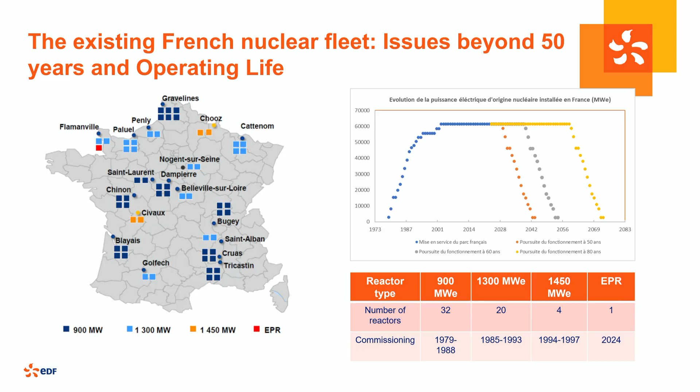So we will have to think to what will be the future and also to plan when we will shut down definitively the reactors and when there will be the opportunity for the EPR2 to take the lead.

Oh, sorry. Yes. What about what is happening all around us? Why continuing after 60 years of operation? Our fleet is quite young because it's 37 years old in average. And as you can see, in Switzerland, in the US, in Belgium, there are many reactors older than the French fleet. And some of them are more than 50 and close to 60 years.

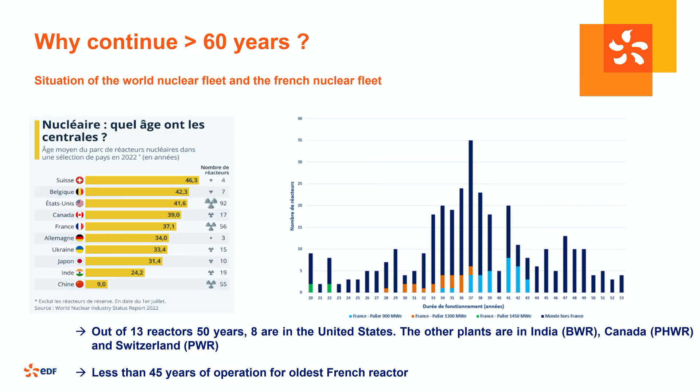So this is very powerful in terms of return on experience. Most of them are PWR, so pressurized water reactors, so same technology. It's quite easy to have benchmark and to share experience with them.

What are the key milestones in France for the French nuclear fleet? In 2021, our Nuclear Safety Authority decided the pursuit of the 900 megawatt fleet. So we have 32 reactors of this type. And this is the visit, so the periodic safety review at the age of 40 years, to go from 40 to 50 years, because in France, it is by 10 years that we have the authorization from the Nuclear Safety Authority.

So in 22, we decided to launch this fourth periodic safety program, with different discussions with the Nuclear Safety Authority. And by the end of 2026, because we send them a lot of data considering going beyond 60 years, the Nuclear Safety Authority will send to the French government the position of the authority regarding operating beyond 60 years. We say beyond 60 years because we don't know if it will be 70, 80.

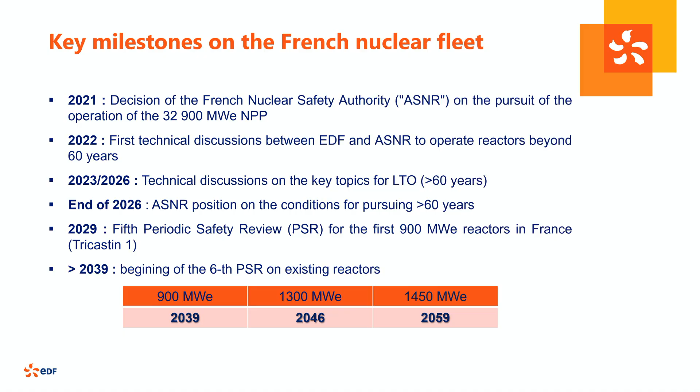So beyond 60 means that there will be a sixth periodic safety review, meaning that we will go from 60 to 70 years. But for some technical side, we are also putting the data and also calculating what it's going to mean for 80 years. So this is data that we are providing, and we'll see what will be the opportunity. But for sure, in France, and I think it will remain like this, it's each 10 years that we obtain the authorization for 10 years more.

When you look at the calendar regarding the different fleets, for the 900 megawatt fleet, it means that this 6th periodic review will start in 2039. And if you look at the N4, so the 1450 megawatts, it will start in 2059. So quite long from here. But it's really the opportunity to speak about that and to prepare also the industrial partners.

How do we proceed for this periodic review? Because as you can see, it's 2060. In 2060, there will be a lot of things changing, and for sure, the climate change. So it's also one specific part that we are working on. So anticipate the expected first. How do we anticipate that? Each 10 years, we have a safety reassessment. So it means that we take the standards, so the safety standards of the moment.

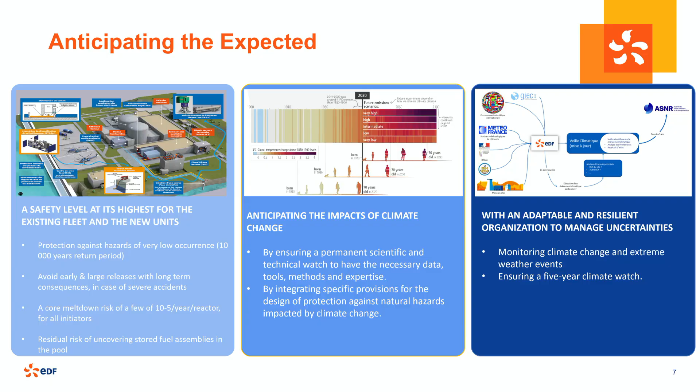And so we are working with Météo France and all different organisms, the data from the GIEC, and by 2060, to take an example, because this is the age of the 6th periodic safety review for the N4, so the 1450 megawatts. So in 2060, what will be the climate for Chooz? It is in the Ardennes, and Civaux. So these are the two plants where we have to think about what will be the 6th periodic review in 2060 or 59 for these plants.

So we are really working on that, doing some projection, and also finding ways to reduce consumption of water and electricity, and to work on resilience.

So safety level, as I told you, each 10 years we have design modification, design improvements. For example, for the 4th periodic safety review that is proceeding right now for the 900 megawatt fleet, we have already completed almost 25 PSRs, so the 4th PSR. There will be the complement to 32, because we have 32 reactors.

And for the 1300 megawatts, it will start in parallel in some months, at the beginning of 2026. So what are we doing? It's Gen 3, so the reference is EPR, as I told you. And we have added safety systems of water and electric supply. This is directly the operating experience of the Fukushima event.

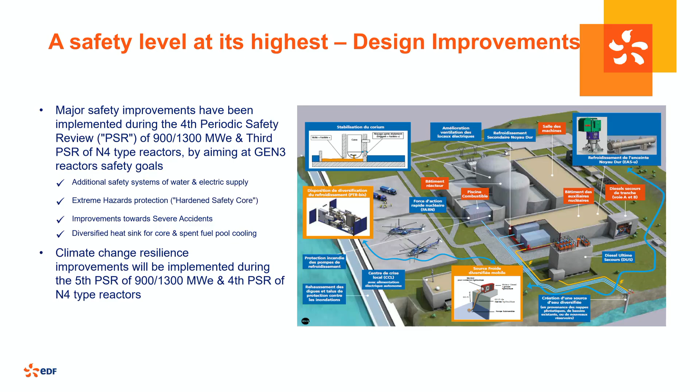Extreme hazard protection, so hardened safety core. Improvement towards severe accidents, meaning that regarding what we will reject in case of accident, it will be close to zero. We are aiming at zero nuclear waste from an accident. And also, we added diversified heat sink for core and spent fuel pool cooling.

Climate change resilience. This is also a topic of different design improvements regarding tornado, high winds, cold, extreme heat. But as I told you, because climate change is going faster than expected, we are really thinking that the fifth periodic safety review, starting in 2029 in Tricastin, will be really focused on climate change modifications, so design improvement. For safety, in 10 years, no more big standards have evolved.

So we have three complementary approaches in the program Grand Carénage. First of all, because our plants are 40, close to 50 years old, we proceed to a replacement of major parts of the installation, for example the steam generator, but also in the turbine hall, some turbine retrofit. Second, it's anticipated work at full power, so replacing primary circuit sections, and also strong collaboration on the project between engineering, site, operator, and supply chain.

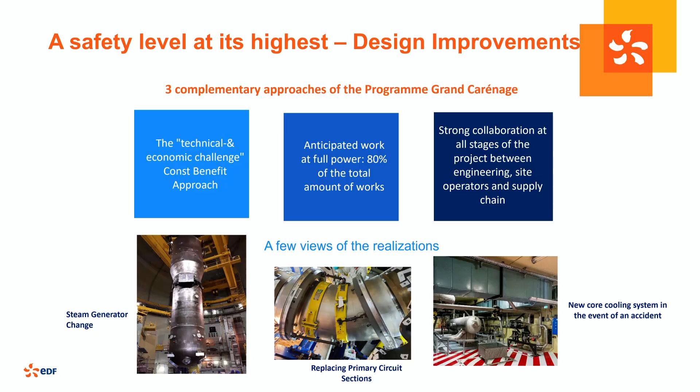This is really what we call the recipe of the Grand Carénage. This is this cooperation with the operation part. They are really embarked in the modification, close to the engineering center, to interact during the design or redesign phase, just to make sure that the implementation will be quite easy on the station, but also for the maintenance and the operation. So this is the way that we are really connecting supplier, engineering, and operators very early. And so you have three pictures of what could be done during this major retrofit or major periodic safety review.

Concerning climate change, we decided to launch a program. This program has really a systemic approach, meaning that it's looking around the system and not only focused on the plant. So what are the data? What will evolve in the system? What will be the interactions, especially regarding telecom, for example, because if we don't have telecom for many hours or days, we will have quite some difficulties to operate after a major disaster coming from climate. So this is systemic and also very connected with the outside of the plant.

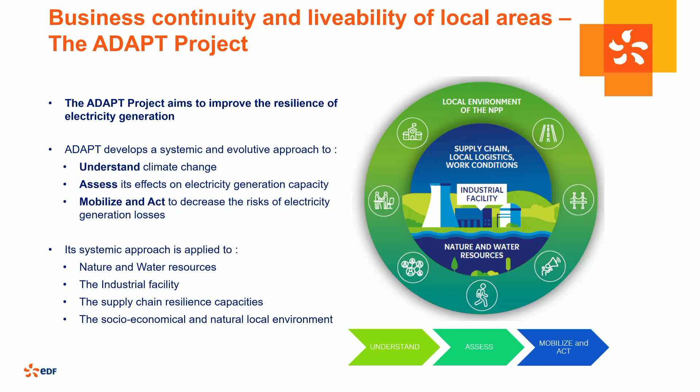Understand climate change: we have a very specific R&D team with climate scientists. Assess the effect, and also mobilize and act. And as I told you, we will proceed to design modifications. The systemic approach is applied to nature and water resources, the industrial facility, the supply chain, resilience capacity. So this is one example, connecting with the outside. Will we have enough fuel or things that we need to operate the station durably? What will be the way of communication with the station? So we are really working with outside the plant, just to make sure that in case of events, this is resilient in a systemic approach. And also, for sure, the socio-economical and natural local environment.

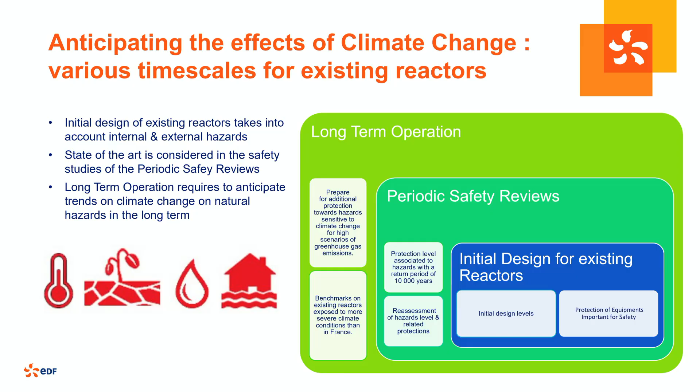This slide shows you how we proceed to anticipate. So you have the initial design for the existing reactors. With the periodic safety review, some design modifications, design improvements. And this is the last step, in a sense: in long-term operation, what will change? So it's a prospection, a perspective, because there are different scenarios and we don't know exactly. So we are looking at different scenarios and then projecting what could be the evolution, and how do we anticipate? What do we have to do to anticipate, just to make sure that we'll be on time once we aim at the objective of, as I told you, 60, 70 or 80 years for our stations.

Concerning climate change, these are the main parameters that we are seeking and also monitoring. So the increase of air temperature, it will be one challenge. The increase of water temperature, especially for the cold water that we use to refresh our process. The sea level, this is for the stations that are close to the sea. The water temperature is much more for the station close to the river. Even so, for the sea, it's also one aspect.

And drought, we know that drought will be longer and more intense. So this is also something that we have to take into account, especially concerning the water that we use to cool the reactors. The good news is that when we do the projection, what will be the climate in each station by 2060, by 2070, somewhere in the world, one station is already facing the same climate.

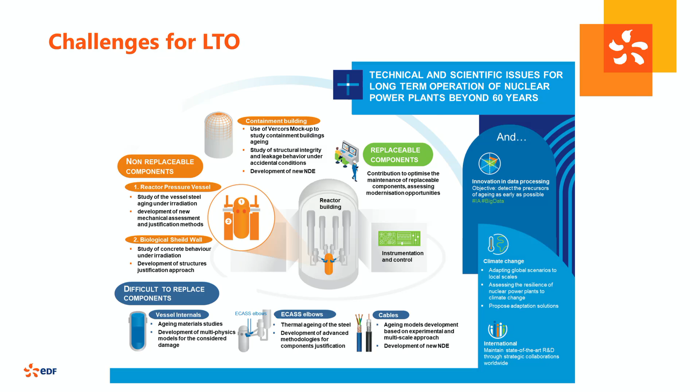So for that, we have a lot of partnerships regarding innovation, because this design improvement modification needs a lot of innovation, new technology, even though in nuclear we try to implement technology that is sure. So when I say new, it's not the technology from yesterday, but it is more recent than in the design, and usually it's 5 to 10 years of demonstration of safety and reliability.